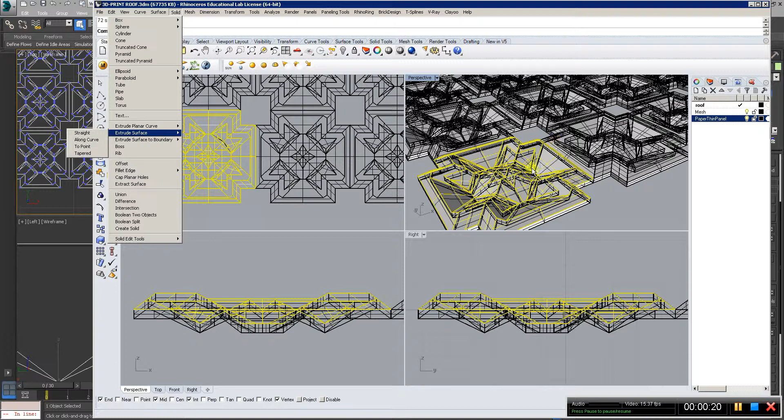Surfaces arrayed out, and then you used the solid extrude surface straight command. What that does is it breaks that poly surface up and creates a whole lot of individual surfaces that are extruded down with surfaces on every edge, creating double faces, multiple edges, 3D printer confused on what's inside and outside, a lot of issues. So I wouldn't use that command because it will break down individual surfaces and extrude them.

If you wanted to sort of make a puzzle piece that combined to make this, it would be good for that because it would print individual pieces, but you'd have to give some space between them all for the printer to not have them all joined together.

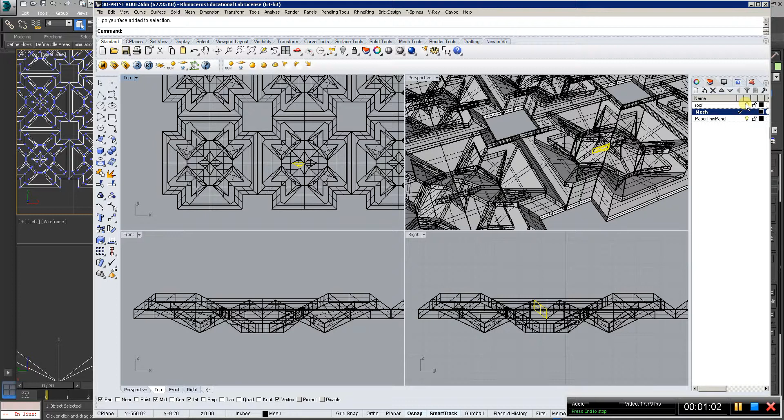So what I did, I took that layer, selected one of those roof panels here, and moved it into this paper thin panel layer here.

So another issue I did find is when you select all these faces, and this has been happening in yours, and join with Control J, I don't know if you noticed, but something strange happened in this area. I deleted it when I found it in 3ds Max, and it seems to be connected to the join command. So I'm going to undo that.

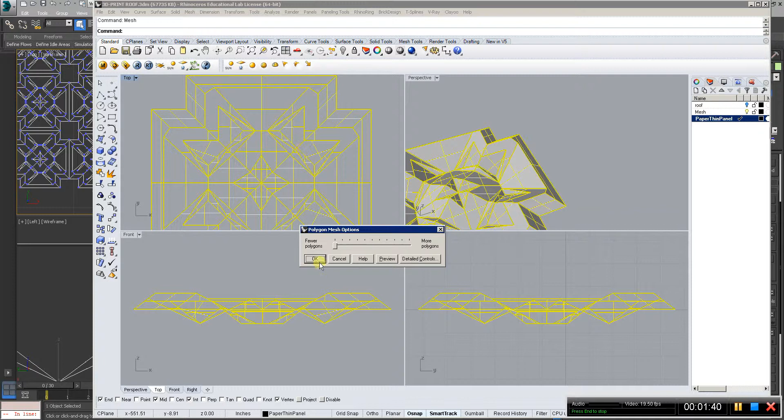You'll see that go back, and we will avoid that and just go ahead and make a mesh of all this. Not too sure what's wrong with that join command. So now I've got a mesh of all those surfaces.

I'm going to hide, and then I can select all my mesh pieces here. So one thing I can do is go and join all those mesh pieces and then array them.

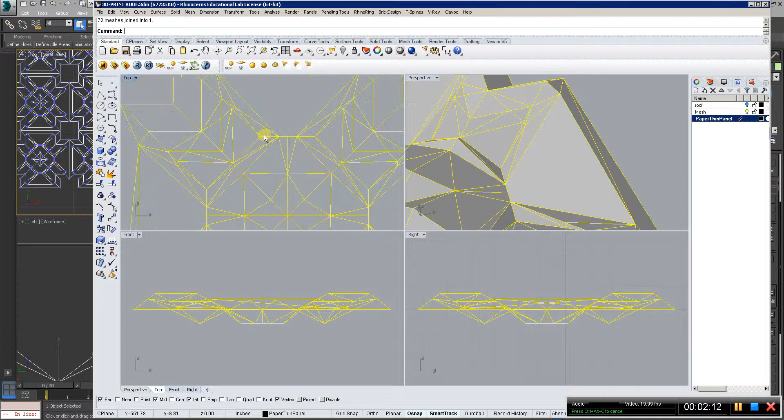First thing you want to take a look at here is there's some sort of inefficiencies in the way it builds the mesh. I'm not too sure why, but there's an extra edge right here that's a flat planar surface, and so that will be an open edge. It'll create issues. There's one vertex here, but there's not a matching edge and vertex coming from that other face.

So what we can do is go to Mesh, Mesh Edit Tools, and Collapse Vertex. And we'll have to do it on all four of those. That will just remove that vertex so that when we array it, we don't have a repeated open edge error.

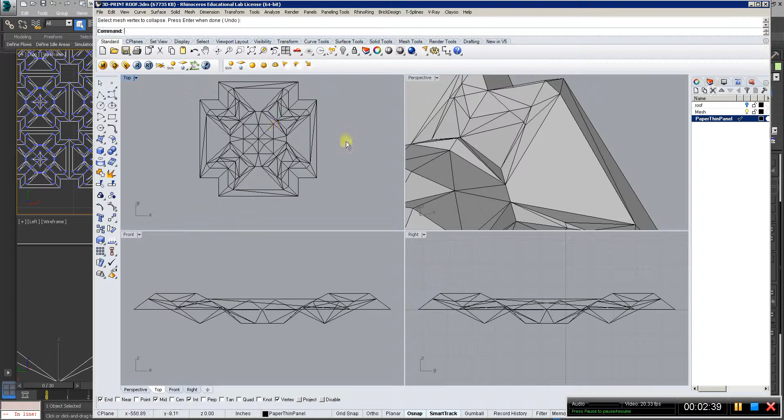So I'm going to select all that. That is one giant mesh. Everything else looks alright. There's some edges that could be turned, but I'm not going to be too picky.

I'm going to go ahead and array this 10 by 4. And then for our unit spacing, we'll use Smart Track on here so that we can set that vertex, and that vertex is a reference point since we don't have a true corner to offset this array.

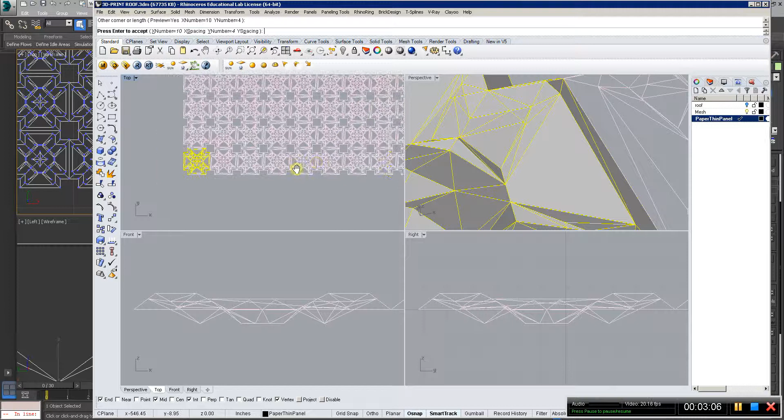We'll do the same on that side. So there we are, all the pieces. Enter to accept, select them all, join them, and then we can export selected and overwrite our paper thin 10 by 4 array.

So I'm going to say new file since I just found that error. I'm going to import that new file. It should have been written a minute or so ago. Go ahead and open, hit OK.

Here it is, it's cleaned up. You can go ahead and ProOptimize. It looks like it did a pretty good job.

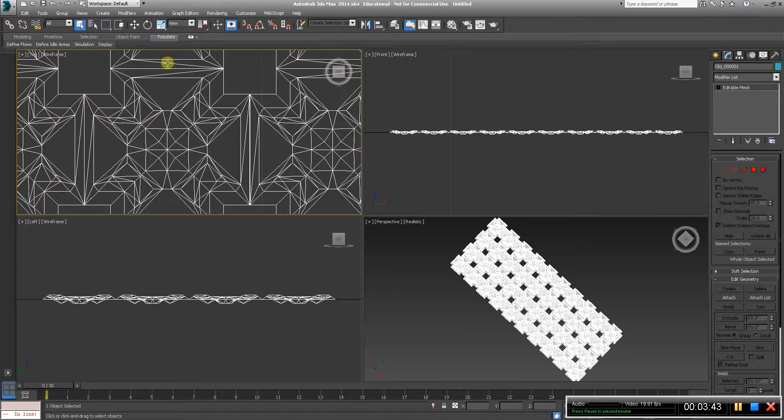Past couple times it had added the vertex on this side, but not on the other side of the panel. So what we can do is go ahead and go into vertex mode with that object selected. Select all the vertices, turn down our weld threshold to 0.2 inch, 0.02 inches.

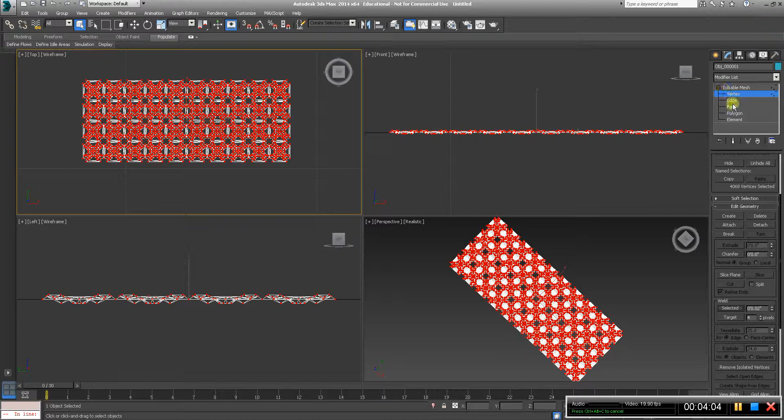Hit select, and you'll see that vertex list drop down. Open this up and go to edge mode. Select them all. This is just for appearance reasons. I'm auto edging and auto smoothing the faces.

If you had curved surfaces or something like that, so the next thing, we will go into edge mode and select open edges, and what we should see is all of our open boundaries, and it looks right.

Before I had them here, and then I also had them here because the vertex, extra vertex was on one side and not on the other. So you can fix some of that stuff in Max, but I showed you how to do it in Rhino if you do see that.

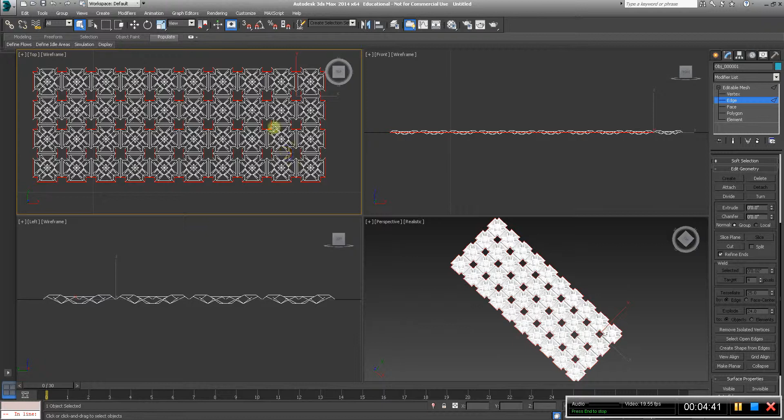But you do need to analyze things before you go and copy them and make sure they're not going to multiply an error all the way across.

Alright, so we've got this object. I'm going to go ahead and make a copy of this. So with it selected, Control V, or that didn't work. I can go to Edit and Clone and ask for a copy of that geometry.

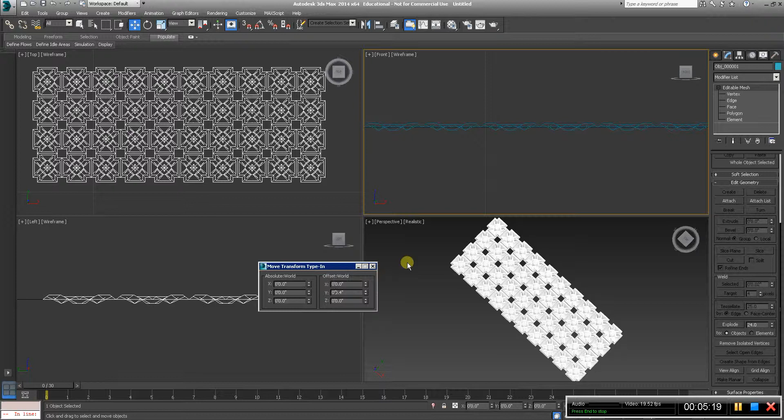And then I'm going to move that down by, I'm not too sure what your value is, but I'll say negative 0.4 inches. And so that moved that down.

So these are two separate objects, and the reason I did that is so you can actually go back to your one here. We've got the select open edges, and if I right click on the extrude panel, that'll extrude it.

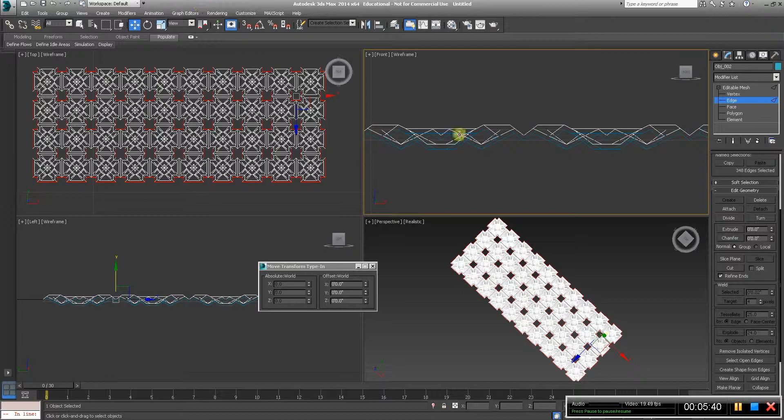You can see in my undo list here, there was an extrusion. It didn't move it at all. And if you right click on these spinners here, it does something at a 0 degree.

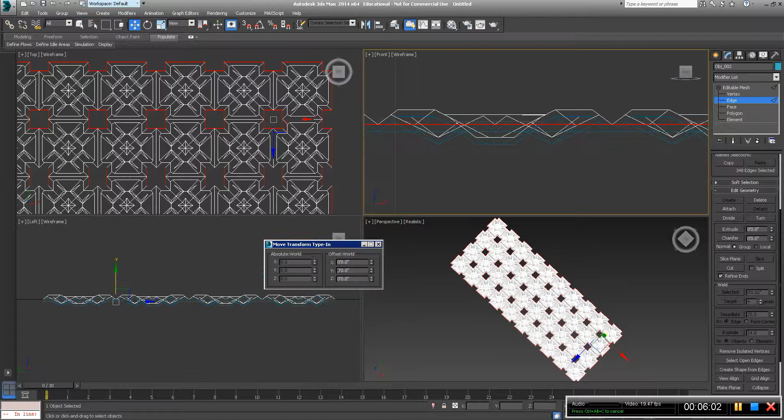So we can go ahead and move this again to negative 0.4 inches. And it should have moved that edge down. It did not, did it? It did, it just didn't update it or something. Yeah, okay, so sometimes visuals don't update.

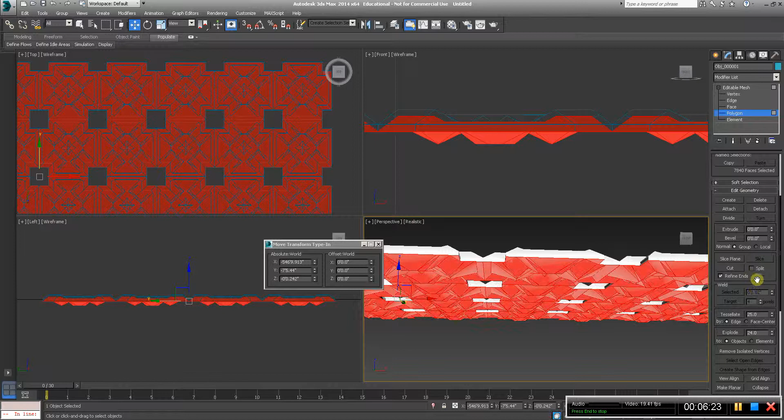So basically we've got that outer edge extruded down to the copied surface here. You can see the normals are not right on that, so I'm going to select all those polygons and flip the normals.

And then we should have the normals facing the right way. Let me go ahead and check. So if we go into the face mode, we can show the normals, and nope, they're going the opposite way.

So that means my other one may be wrong too. So I'll go up here and select, and those are all pointing the wrong way. So this, you just got to check which way normals are before you finally attach the other object.

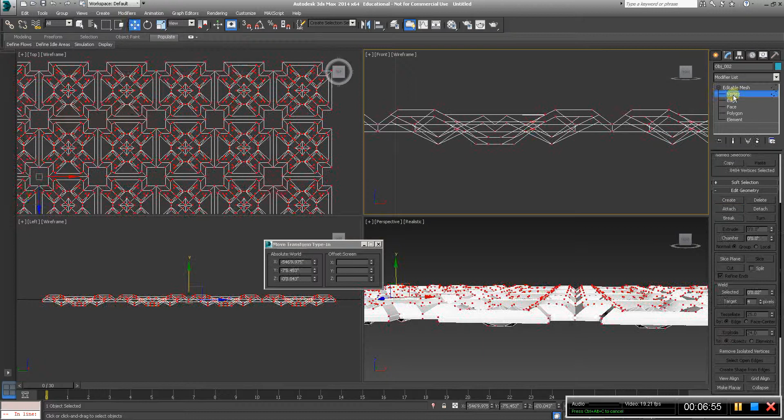Select and weld all the vertices. Then we should have in our object list, if we hit H, we should just have one object.

We can probably rename this STL check pass, and make sure I'm not in a sub-object mode. Go to the top of the editable mesh modifier and then put STL check, and hopefully 0 errors. Alright, so that's done.